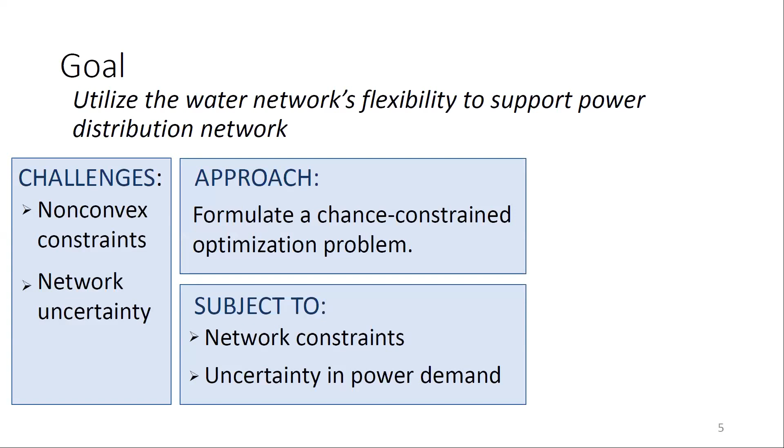Since the water network and power network are both critical infrastructures, we care most about feasibility. So we formulate the problem as a chance-constrained optimization problem, which considers both the network constraints and the uncontrollable power demand uncertainty.

We jointly solve for the optimal water network pumping schedule and an affine real-time control policy to respond to the power demand forecast error.

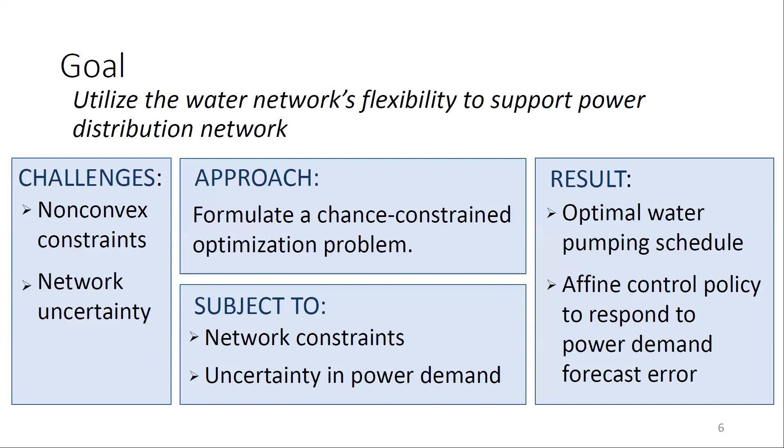So I will first review the formulation for the water and power distribution network. The water distribution network is characterized by the hydraulic head at each node and the volumetric flow rate of water through each pipe. In order for the water network operation to be realistic and safe, the hydraulic head at each node, the pump flow rates, and the tank levels all have upper and lower limits.

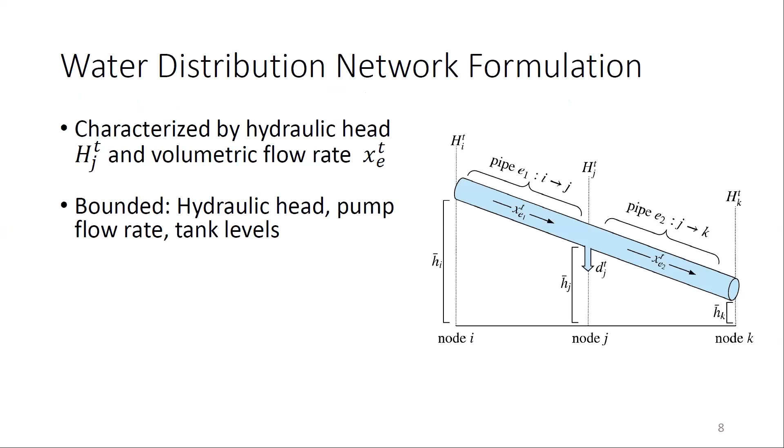Lastly, there are three constraints that are nonlinear or non-convex equality constraints. Using the method from reference 2, we approximate the quadratic pump performance curve, and additionally we replace the quadratic pump power consumption and pipe head loss equations with their convex hulls.

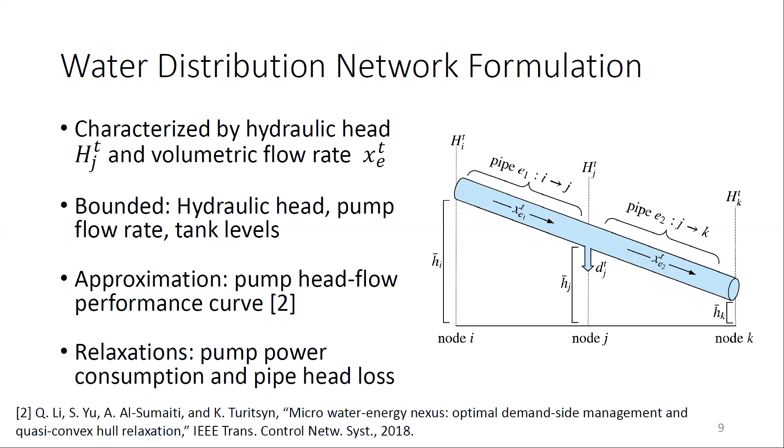For the power distribution network, we consider a radial network. The loads in the power distribution network are composed of the uncontrollable net load and the controllable water supply pump load. We limit the voltages at each bus and phase. In order for the power distribution network to be convex, we use a linearized three-phase unbalanced power flow model. The formulation neglects the loss terms and assumes that the voltage imbalance is small.

Next we include the power demand uncertainty and then formulate the control policy. We denote the power demand forecast error at bus K, phase phi, and time T as this tilde rho value, and the auxiliary random variables, which are dependent on the power demand uncertainty, are denoted with a tilde.

The purpose of the control policy is to adjust the pump operation to compensate for power demand forecast error when there is a voltage constraint violation. Because of this, it can be thought of as a corrective control policy.

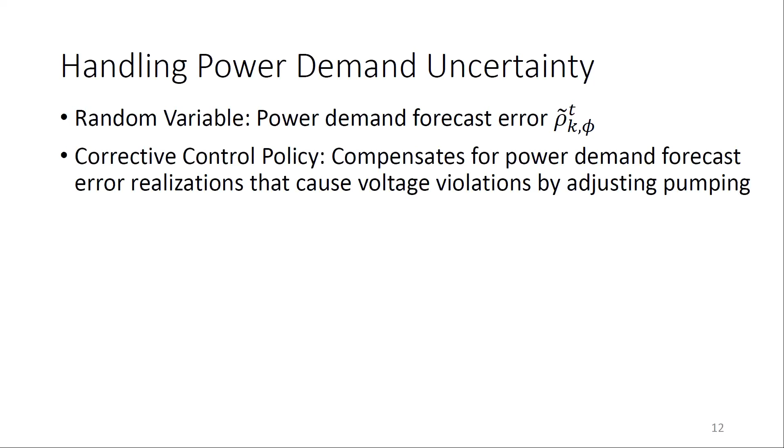However, not all power demand forecast errors require corrective actions by water pumps. To incorporate this into the formulation, we introduce an auxiliary binary variable tilde s that equals 1 when there's a minimum or maximum voltage limit violation, given the scheduled pump power consumption and the power demand uncertainty realization. When tilde s equals 0, no corrective action is needed and the pumps maintain their schedule.

So the control policy is shown at the bottom, where the control policy parameter C sub E is a row vector, and it is multiplied by the power demand forecast errors for all buses and phases that have loads. This determines the corresponding change in flow rate for a pump, denoted tilde X sub E.

Despite the pump flow rate adjustments shown here, the pumps and tanks must provide the same amount of water to the network.

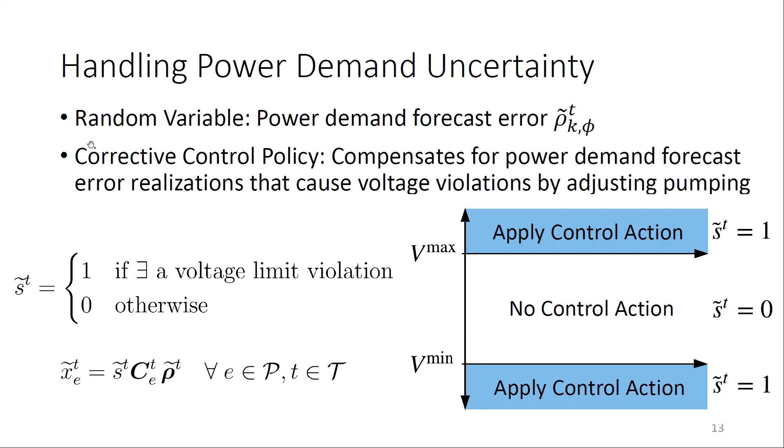Here I outline the mixed integer convex chance constraint problem. We want to minimize the cost of the scheduled water network pumping operation and the flexibility cost associated with adjusting the pumps from their schedule in real time. So in order to penalize excessive control actions, we set the flexibility cost as the Frobenius norm squared of the control policy parameters.

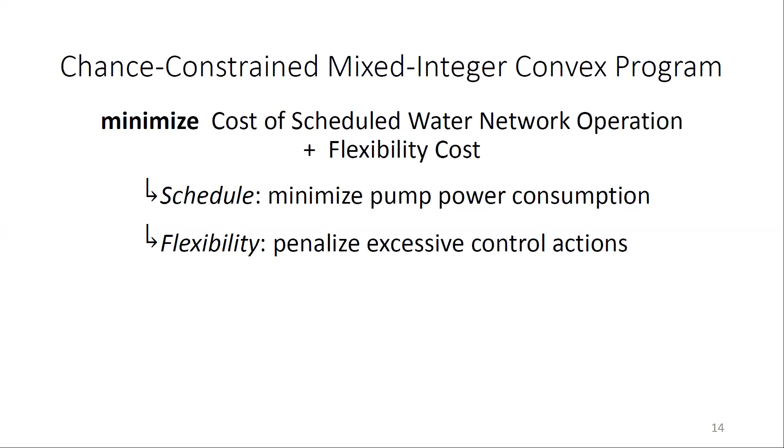And then we solve the chance constraint problem to determine the scheduled pump and tank operation, as well as the control policy parameters. This problem is subject to both network constraints and a chance constraint, where the constraints should be satisfied jointly for a probability level of at least 1 minus epsilon, where epsilon is the violation level. The constraints included are the control policy and the stochastic equivalent of the network constraints, given the power demand uncertainty.

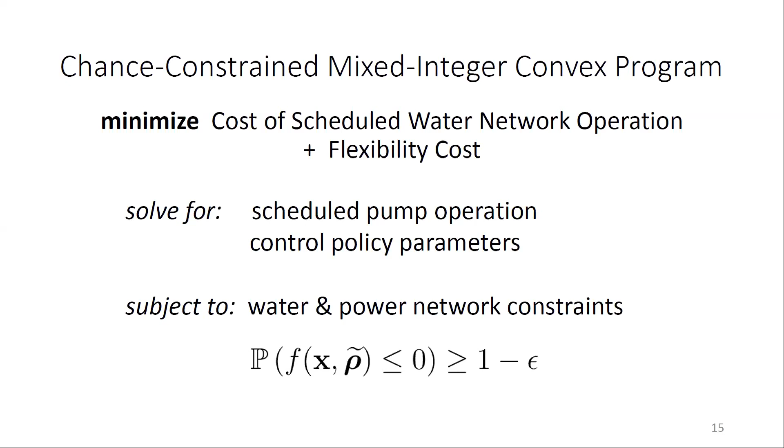To solve this problem, we use the scenario approach for convex programs. In this approach, the problem is solved robustly for a certain set of scenarios, and the number of scenarios needed for a convex problem is determined by the user-selected violation level epsilon and the confidence level psi, given by this function n.

To use the scenario approach for convex problems, we need to simplify the formulation. We do this by removing the binary variable and applying the control policy to all scenarios. The problem then becomes a convex quadratically constrained program.

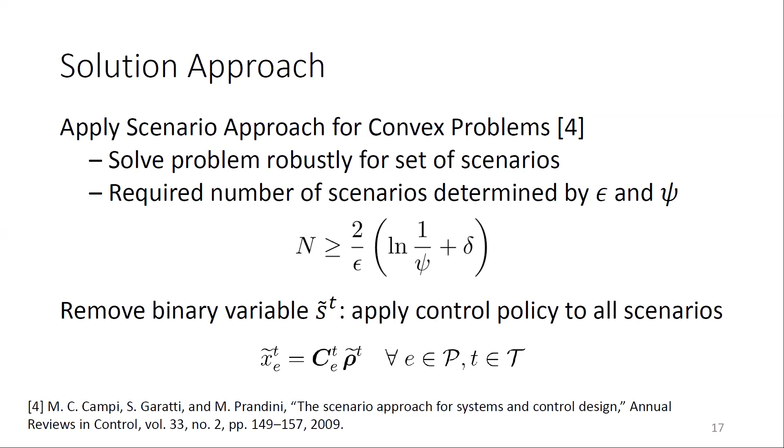While there exist scenario approaches tailored to mixed integer random convex programs, these methods require significantly more scenarios than the approaches for convex problems, in addition to requiring a more computationally intensive mixed integer solver.

To illustrate this, I compared the solutions found by solving the mixed integer convex problem and the simplified convex problem with a fixed number of scenarios, for a coupled water distribution network and power distribution network, which is described after this. We observed in this test case that the solutions are essentially the same, but the convex problem takes significantly less time. If the solutions were different, the main concern would be if we inadvertently caused constraint violations by always applying the control policy, regardless of whether the system needed it.

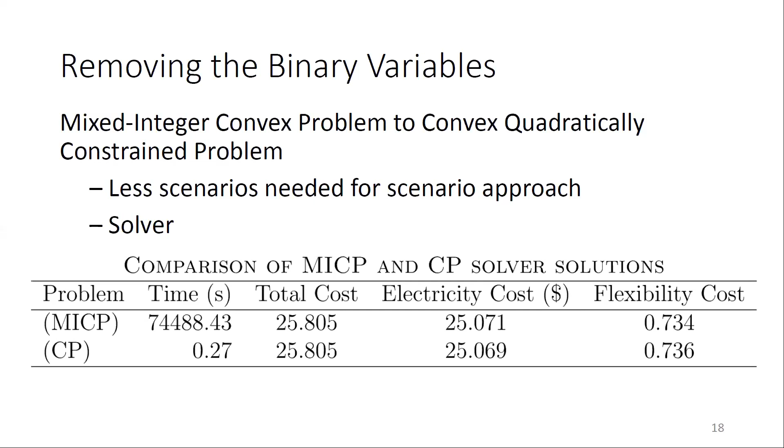Next, I'll present the case studies we did. We used a coupled IEEE 13 bus test network and a water distribution network from the literature, where the pumps are balanced three-phase loads in the power distribution network. We looked at several single-period and multi-period cases designed so the power distribution network is near the minimum or maximum voltage limit constraints.

The power demand forecast error was generated using a truncated Gaussian probability distribution. The error at bus K, phase phi, and time t had a mean of 0 and a standard deviation of 4% of the net power demand at that bus and phase.

To evaluate the reliability of our solutions, we use the Monte Carlo method to test whether all water distribution network and power distribution network constraints are satisfied for 100,000 randomly generated uncertainty realizations. The empirical violation probability is calculated as the percentage of realizations for which at least one constraint is not satisfied.

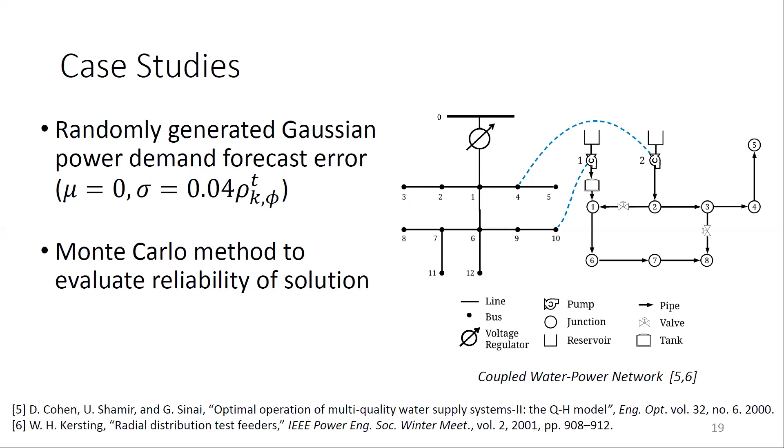So I'll first show some illustrative results from this approach. This figure shows the scheduled pump and tank operation for two different cases. In the left column, case A has constant high water and power demand. In the right column, case B's water and power demand starts high and then decreases in the next two time periods. The blue line shows the schedule for the chance constraint approach, and the red dashed line shows the optimal schedule based only on the forecasted demands. We can see that the chance constraint pump and tank operation vary more between periods than the deterministic schedule.

This is because the scenario approach's schedule needs to ensure that the forecast error realizations do not cause power distribution network constraint violations. For example, pump 1 is less expensive than pump 2, but it is located at a bus that is closer to its minimum voltage limit. In order to satisfy each scenario's voltage constraints, pump 1 must decrease and pump 2 must increase, which is a more expensive operating point. In case B, the tank's net outflow is increased to meet the reduction in pump 1's flow rate, and later, when demands are lower, extra pumping is used to refill the tank.

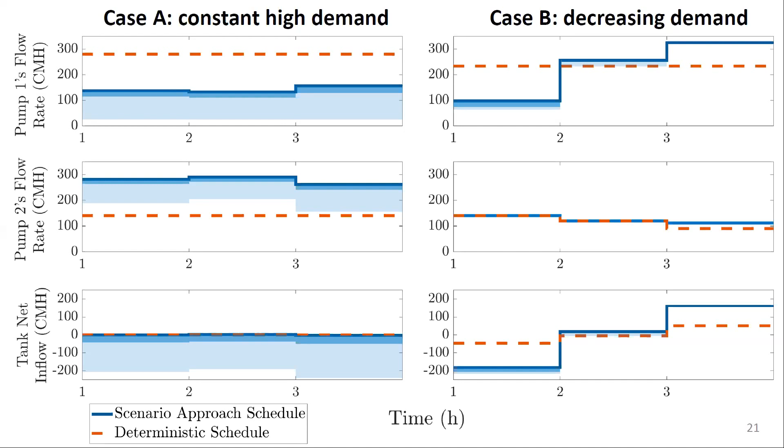This is an example of using the real-time control policy when there is a voltage limit violation. The plot shows the three-phase linearized unbalanced voltage profiles associated with a power demand scenario before and after the control policy adjusts the pump operation. As we can see, the initial voltage profile, shown in green, is outside the voltage limits, and once the pumps are adjusted, the voltage profile is within the voltage limits.

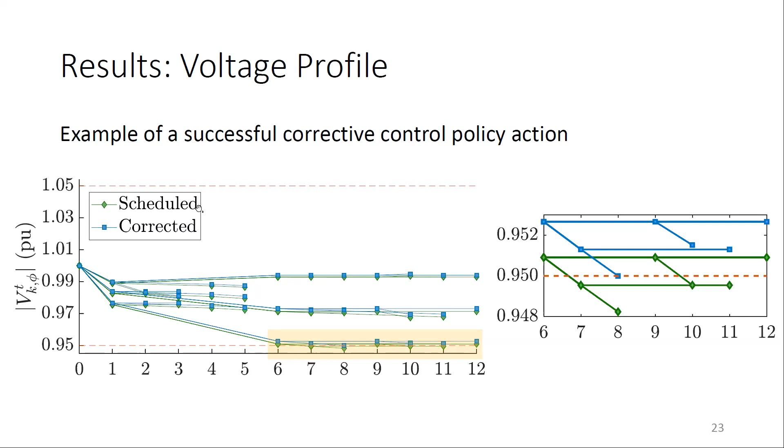In this case study, the voltages on phase C are most likely to cause lower voltage limit violations, and consequently, the magnitude of the control policy parameters associated with the buses and phases within this inset are the largest. We see this small shift in voltage profile because the chance constrained optimization problem has no incentive to correct the voltage any more than necessary, since the approach focuses on feasibility and the objective function seeks to minimize the real-time pump adjustments.

Lastly, we look at the performance of the schedule and control policy. For different standard deviations and user-selected violation levels of case A and B, I have shown the total cost and the empirical violation probability. As expected, when the user-selected violation level epsilon is reduced, the total cost increases.

This is because the schedule and control policy must become more conservative to handle more scenarios. And we see that the empirical violation probability is much lower than the user-selected violation level, which is typical for the scenario-based approach. Additionally, the user-selected performance guarantees only hold for the convexified problem and not the original non-convex constraints.

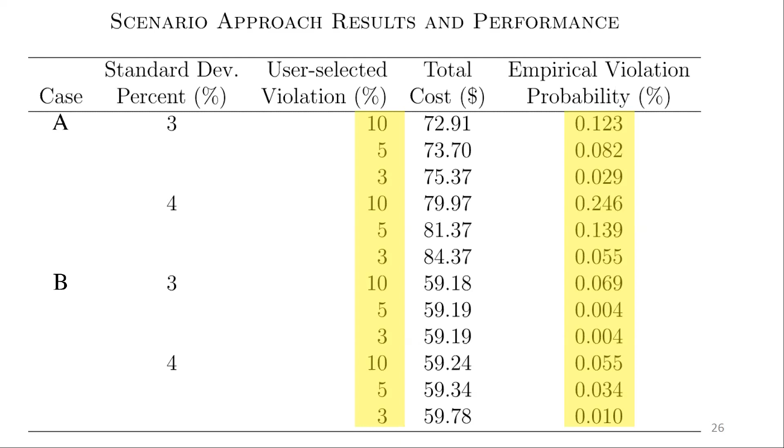In this work, we were able to successfully utilize the temporal and spatial coupling of the water distribution network and power distribution network to provide voltage support in the power distribution network. The approach is computationally tractable, and given the nature of the scenario approach, produces a solution that has a high cost and a high reliability. Listed below is some future work.

All right, questions? Okay, thank you very much, Anna, for the nice talk. I have a question from Dan Molzahn.

He would suspect that the dynamics of the water network operate at time scales that are quite a bit slower than the dynamics of the power system. If he understands your formulation appropriately, you don't consider the water system dynamics. Does this have an impact on the feasibility of your solution in real-time operation, or is it not an issue?

In this problem, we're looking at 1 hour time steps, which is usually the kind of planning and operation time steps that are used in the water distribution network. But I guess if using smaller time steps, the pumping can be changed, and we're not necessarily looking at that. We're just assuming a constant water demand for the entire time period, if that answers the question.